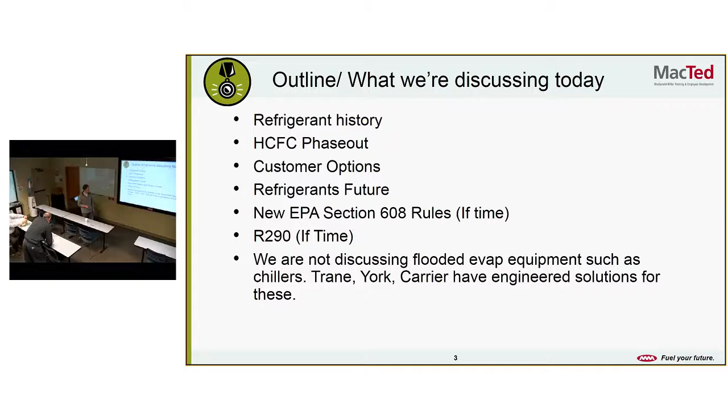So some of you were here in '96, went through this. Maybe not Dan, I was on the tail end of this. We phased out CFCs, chlorofluorocarbons. That's CFC. In '96 we got rid of the R11, the R12, the R113. Turned out that it made a hole in the ozone layer. I was in high school, I remember seeing the hole. It was all over the news.

It was a big deal. And what they determined was that those CFCs get up in the atmosphere, the sunlight reacts with them, and it destroys ozone. Ozone protects the Earth from UV rays from the sun, and it was letting too much in, and we had global warming.

So they brought in HCFCs. Those were going to be the magic potion. HCFC, that's your R22, hydrochlorofluorocarbon. They added the hydro. That's your 22, your 123, 401, 409, 402, 408. Some of those look familiar to you. 22, of course, is the most well-known, but there are others.

Anything that the R11, that I could buy it for $100 a pound for my old car, all that stuff is just reclaimed. It's just been scrounged up. R12, like R12, is used in cars for a long time. Anything pre-2000 possibly had R12, probably 94 and below, something like that. Most things around 94, 95 they went to 134a.

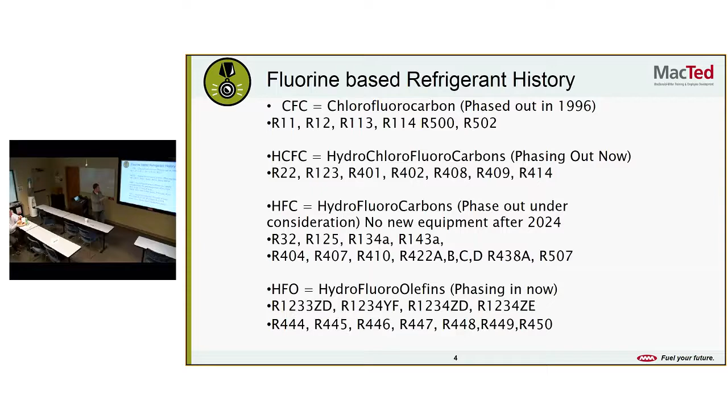The thing is, what we're finding, or what happens is, we can't jump HFCs. We can't go from equipment sold with R22 and put these in it. And I'll get to why here in a little bit. So what we're doing is this whole class revolves around HCFCs, getting rid of those, and getting rid of HCFCs, bringing in the HFCs, even though they already have a date, an expiration date.

So this all started with a thing called Montreal Protocol. You've all probably heard that before. Is that in relation to retrofit? Yes. Yes. There was a meeting.

They said we need to bring levels down starting in 2015. You start reducing these levels of HCFCs, and we want to have them down to almost zero by 2020. After 2020, there is no more importation of R22. or making it, so virgin R22. That's the big one that we're dealing with. There's others, there's this 142B and stuff, but we don't really get into that.

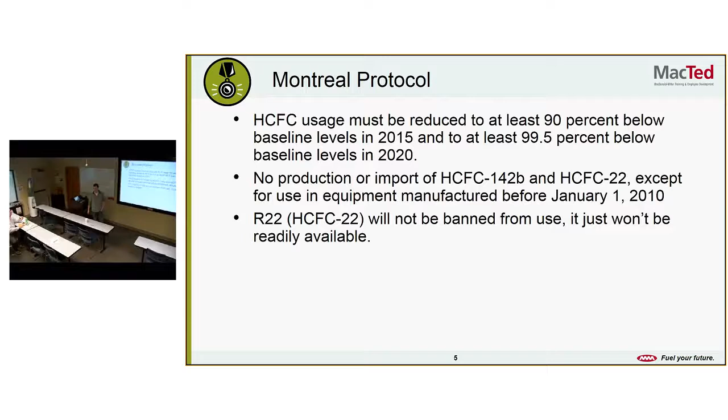So what that looks like is, it used to be we had unlimited supplies that could be made of R22. Supply demand, right? So we had a ton of supply. Things were cheap. Well, Montreal Protocol came in and said you need to cut whatever your production is for 2014. You need to basically cut it in half. And then you're going to continue to cut it all the way to 2020.

So right now, that's where we're at. This year, they'll be done. The major manufacturers, Chemours, DuPont, Honeywell, they're going to be done making it for the year probably in the second week of February. They start on the 1st. They make it for about 6 weeks. Last year, they made it for about 8 weeks, and then they're done for the year. They'll probably make it 6 weeks this year, and then they're done, shut down.

So whatever is made gets out there. Valentine's Day, supply houses get their allotment. RSD gets a certain amount. United, Johnstone, they all get an allotment, and away they go.

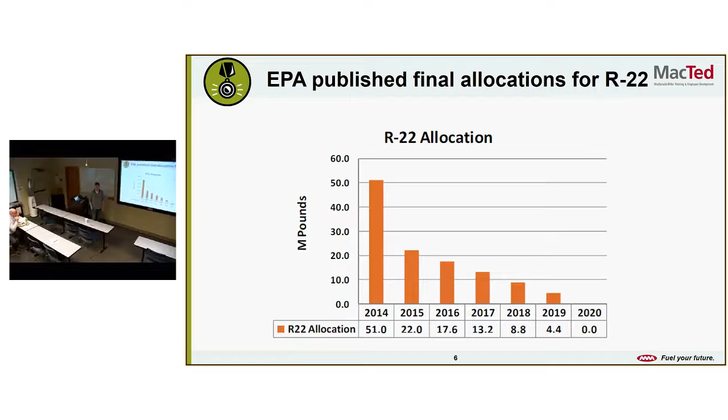So what that looks like, supply and demand, we used to be able—I remember, and I'm not that old, but I remember being able to go to RSD and buy a 30-pound jug for about 30 bucks. I'm sure it was cheaper at one time before that. And it stayed pretty cheap for a while until, you know, they knew that this was coming, and it started climbing, had a jump, and then it started climbing.

So we're somewhere right here right now. It hasn't climbed as much as projected originally. For 30 pounds? For a 30-pound cylinder. Yeah, one green jug. Everybody should be familiar with the green jug. So whether that's going to happen this year or not, I don't know. We'll talk about prices and where we're at today here in a few minutes. But that's basically, as our supply goes down, our demand goes up, and therefore our price. So that's where we're at.

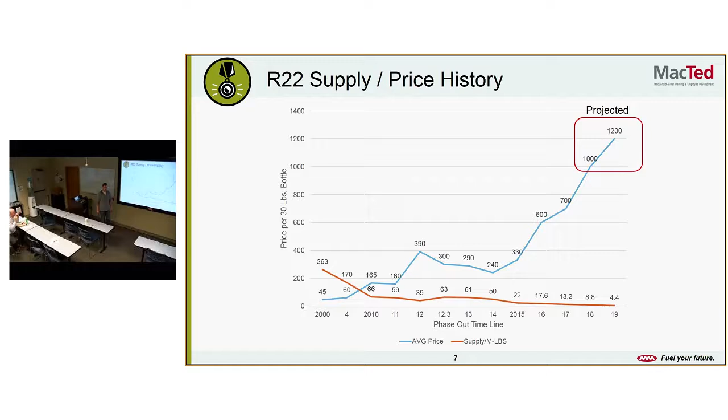So there's options for customers. This building, this was all R22 equipment. Upper building, all R22 equipment. A lot of buildings—I mean, this stuff was made for so long. It was the golden juice, you know. It was just, it was cheap. It worked well. It went into everything. So there's thousands and thousands of units that are out there.

Some of this, they have some options. They can do nothing, they can leave them. There's no law that says you can't use R22. We just can't make it. So there's no law saying you can't have it. There's a law that says you can't bring it in on the back of your truck from Mexico, but there's no law that says you need to get rid of it. So you can do nothing.

You can remove the 22 and put a retrofit refrigerant in. The reason that you would do that is because it extends the time that you can get the refrigerant for cheaper.

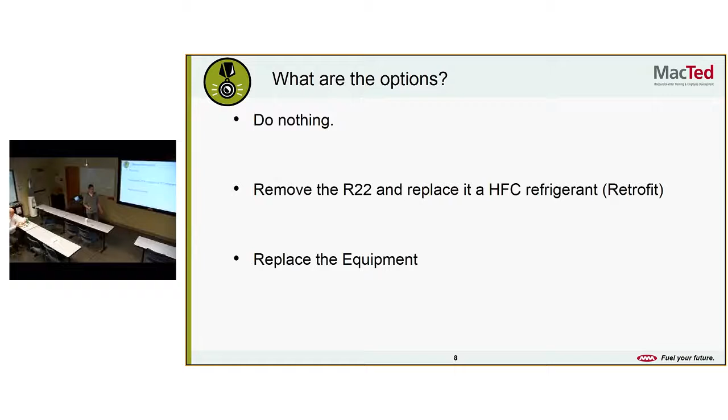Right now with the HFCs, remember there's a date for when you can't buy new equipment, but no date for when you can't buy the refrigerant itself. It's just new equipment that stops. We went through this in 2010 with R22 - they stopped making new equipment, and then production of the refrigerant tapered off. Pretty soon we had dry units for a while, and you're right back to what they're saying. It's a projection, so it'll happen. You can remove it and try to buy yourself some time, put something else in there, or you can replace the equipment. We'll go through and talk about this.

The good part about doing nothing is that nothing works better than what shipped in the unit - there is no magic juice. There's a lot of claims out there that you can take out R22 and put something in that has more capacity for less money, and it's not true, it just doesn't happen that way. So if you have equipment with R22, it's going to run best. If it's at your house or your business and it's running good, what's your risk? Do you have a high tolerance for risk? Leave it, deal with it.

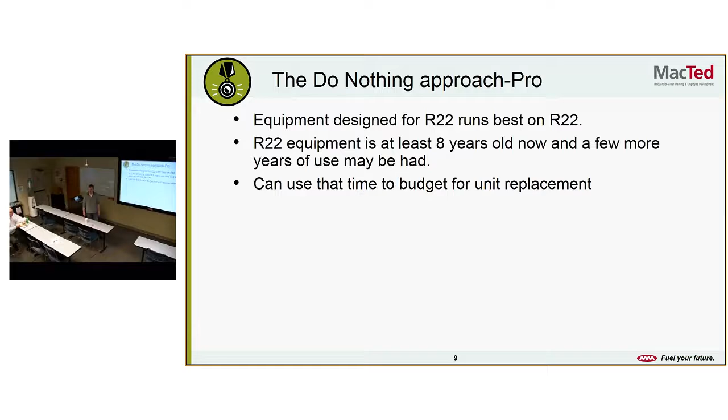If you're worried about it, like CBRE or some property managers, they want to do something about it. You may have a piece of equipment built in 2010 or 2009 that has R22, so maybe it's only 8 years old - you might have some life left in that thing. You can use that time to budget and figure out what you're going to do. So customers don't have to get super antsy about it, but it's something to think about.

The bad part is R22 is about 23 bucks a pound right now - I think it's come down a little bit, we'll look - but it's getting expensive, and that's wholesale, so we're going to mark that up. So if you have a blowout of a circuit that holds 100 pounds, that's going to get expensive real quick. Maybe you can afford one blowout, but what if it happens again? It's about your risk tolerance.

For non-techs, for the salesman, I tell them about 1.5 pounds per ton. So you got a 10-ton unit, you're about 15 pounds of refrigerant. You can kind of do the math from there. Lieberts tend to have a little bit more refrigerant in them, other units tend to have a little bit less.

Property managers - I know when we met with CBRE, Tom Ripley said they see this as a liability. If you got a strip mall with 10 package units on it, and each one has 10 pounds of gas, that's 100 pounds of gas or whatever - it's a liability, is what it is. So when they're looking at buying a building, they look at that and say, well, that's a liability, do I want to buy that, do I want to take on that liability? So there's reasons to get rid of that refrigerant.

He was also talking about an accounting problem with it too - as the values started spiking up, they'd have to actually identify it, it's on the books as income. Accounting's weird, I don't know. So if you lost a charge, you've got to deal with it.

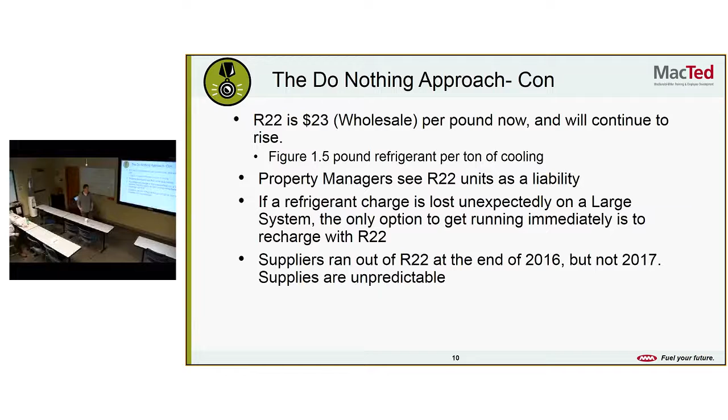So the good part about doing a retrofit is you're planning - you have time, you can gather what you need. We'll talk about those parts, but you can gather the necessary parts to do a retrofit. You can do it on your own timeline - do it on a weekend, do it at night, do it when it makes sense, just like anything, planned maintenance. You don't have to worry about the R22 shortage.

That's pretty big. Some equipment was designed for alternative refrigerants. There's a lot of Trane Intellipacks made in the late 90s up until about the mid-2000s that shipped with R22, but they could have had 407C in them just as easily. So doing that conversion may be pretty simple.

R22 has been known as a compressor killer forever. It's got high discharge temps, and eventually the oil converts over to carbon and you lose the compressor.

Retrofit refrigerants tend to have a lower discharge temp, so you may get some more life out of compressors, maybe.

Suppliers buy back R22, so that's a selling point. If we can go in and take the refrigerant, say you have 100 pounds of R22 that's clean, we can take it out and sell it to Hudson for 12 bucks a pound. Then we can knock the cost of that off and share that with the customer, and that saves them some money on their retrofit.

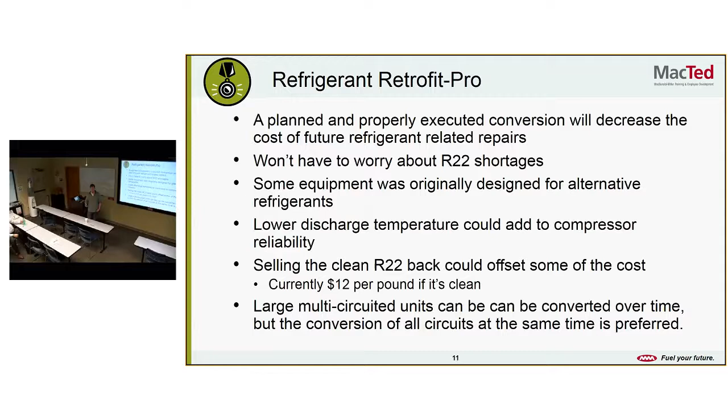This is a part from the chart from the Department of Energy. I think it seems a little generous, but basically what it's saying is that based on the size of your unit, of your system, you can count on about a 20% loss of charge per year. That seems high to me, but maybe if you averaged it over the lifetime of the unit, maybe you could build a case for that 20%.

But what it's saying is that on smaller systems at the current prices, it probably doesn't make sense to convert that unit, because the cost of conversion versus the amount of refrigerant you use on a yearly basis may not pay for it. But as you get bigger, that definitely starts to pay for itself.

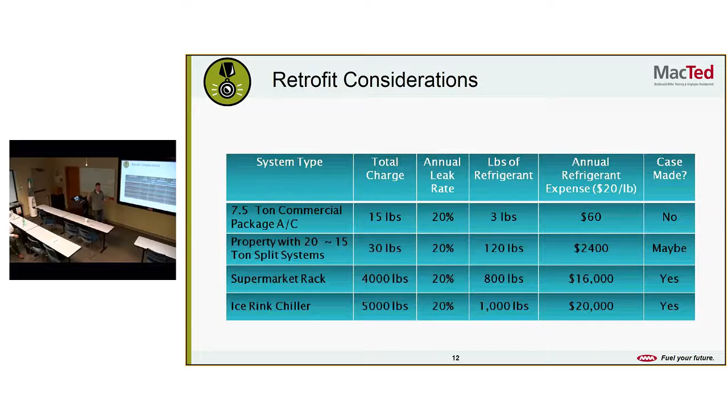And as the cost of R22 goes up, these numbers are going to get smaller and smaller. So maybe eventually a 7.5 ton unit is worth converting because the price is so high. But if you were to take this on its own, maybe it's not worth it. But if you have 25 of these, now it's probably worth it because that's how much tonnage you have on your building. So it's something to think about, because as a property manager, they have to think about their buildings as a whole, their campus.

So there is a bad part about retrofitting. There could be a drop in unit capacity on design days. Design days, that's generally 100 degrees outside air temp, 80 degrees inside, something like that. We don't have a lot of design days in the Northwest. Most of our equipment is oversized, so this really doesn't matter. The testing we've done, we've never seen 10%, but we don't have those temperatures either, maybe Eastern Washington. But there's some things to think about when you're proposing these.

Efficiency, energy efficiency will probably go down. If it was built for R22, it works the best on R22. So compression ratios change, and that changes the amp draw on the compressors. So that's your energy efficiency.

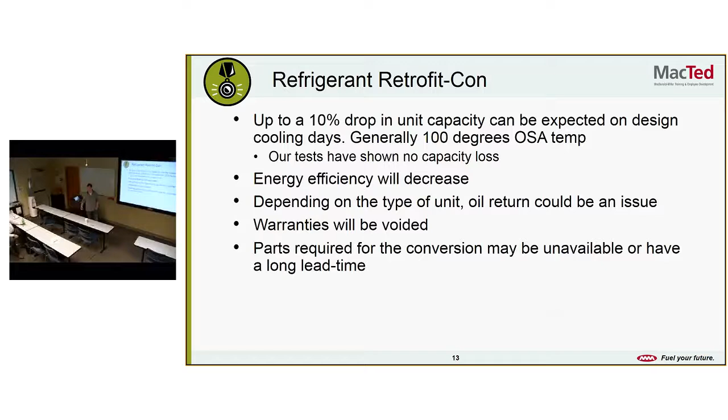Warranties will be voided, but this is all older equipment for the most part, so warranties isn't a big deal. And then parts required for the conversion, which we'll get into, sometimes take a while to get depending on what you need. If you're converting a 30-year-old Mammoth vertical self-contained unit and you need a liquid line solenoid valve, maybe you can't get it. Maybe you got to do something else. I don't know, we'll talk about it.

Then, of course, there's the last option, unit replacement. What you're buying today has 410A in it, and you're going to be in the same boat again in 6 years. So that's kind of the downside. And if they decide to ratchet up that schedule, they may be in a pinch even sooner. But I think it's a good idea to replace. There's benefits, there's efficiency benefits, but it is something to think about.

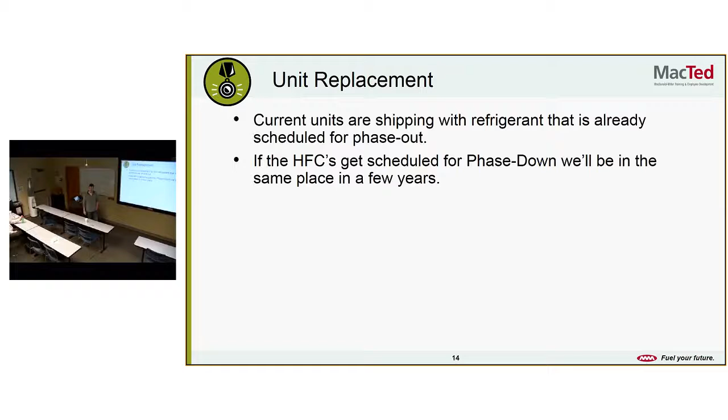So what are we doing? McDonald-Miller, we've standardized on 2 refrigerants for conversions: 422D and 407C.

407C is probably pretty familiar to you. Liebert's been using it for a long time, Trane's been using it for a long time, and several other manufacturers too. 422D may not be as current with you, you may not recognize it as much. Both of these are Honeywell products.

We did that on purpose, because there are refrigerants out there made by different companies that we don't know what's going to happen in the future if they decide to quit making them, or if the price all of a sudden goes up. We wanted to partner with a company that had a good brand name and some recognition, so that's why we went with Honeywell. There's another company that makes 422B, it's almost the same formula, but it's not made by Honeywell. It's a different proprietary blend. Well, what if they quit making it? Then we're kind of scrambling. We wanted somebody that's going to be around, and Honeywell's going to be around.

If the equipment is larger, or you're doing a compressor, we say 407C all the way. The difference is 407C can only be used with synthetic POE oil, it doesn't mix with mineral. Most R22 units ship with mineral oil, so you cannot just take R22 out and put in 407C. It doesn't mix with the oil if it's mineral. That's why we have this option. 422D does mix with mineral oil, so you can basically take the R22 out and put the 422D in. There's a couple other things to consider, but we'll talk about them in a few minutes.

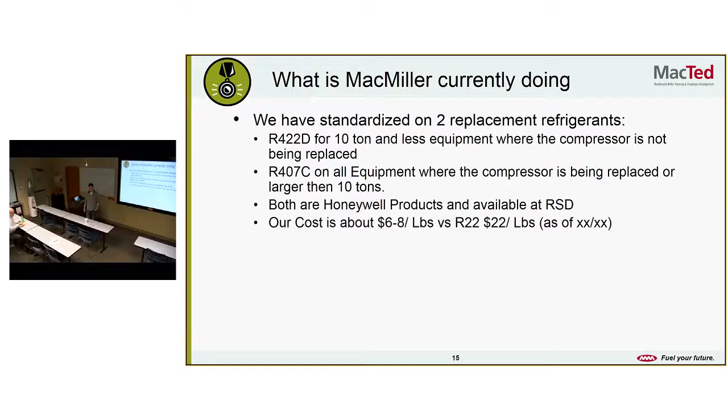Exactly. So we converted this building to 422D. We did every unit on it about a year ago, right before the summer, and everything's run fine. Guys took out the R22, put in the 422D, and it's been fine. Not that this is a huge heat load building, but upstairs, the second floor ran all winter. It still runs in cooling - you'd think it would economize. We didn't replace any compressors - we just did it as a test.

Could you envision a point, and if you could, what price point would this thing start to become a theft issue, the way guys were stealing copper coils out of units? Stealing R22, for the hassle, they'd have to be paying probably $30 a pound or more. I mean, there's a lot that goes into it, and it has to - I don't even know how that would work, but I've heard about refrigerant theft. There's caps, we've all seen the locking caps, there's a special key. So somebody's stealing it. Yeah, somebody steals it. I just don't know who it is or what they do with it.

Well, and they're also using it to get high on too. So I think what they're doing - you know what I think they do? I think they take it out and then they go resell it to a homeowner. They're not like we are, they're not selling it to Hudson for $12. They're selling it to Joe homeowner or another business park for $100 a pound. That's what they're doing.

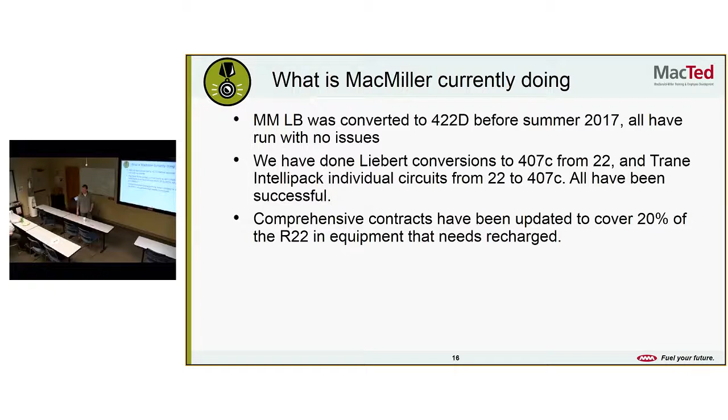When converting it to 422D, do you have to replace anything? We'll talk about it.

So 422D, just the specifics on it - $8 a pound. It mixes with mineral oil or POE, you can use either. It's in that nice lime green cylinder, so you don't have to change the oil. Take out the R22, you can put this in there. We're considering it residential light commercial, but there is no paperwork that says that it is - that's what we consider our light duty, light commercial option. Is this considered an HFC? Yes. Because you can't skip HFCs with retrofits. We can't buy HFOs right now for unitary systems - I'll tell you why, we'll get into it a little bit. But yeah, that's an HFC. Best to use it on small tonnage units where there's a leak, you're not changing out the compressor, so a flat unit or the customer just wants to get away from R22. That's why this building was perfect - a bunch of small tonnage rooftop units.

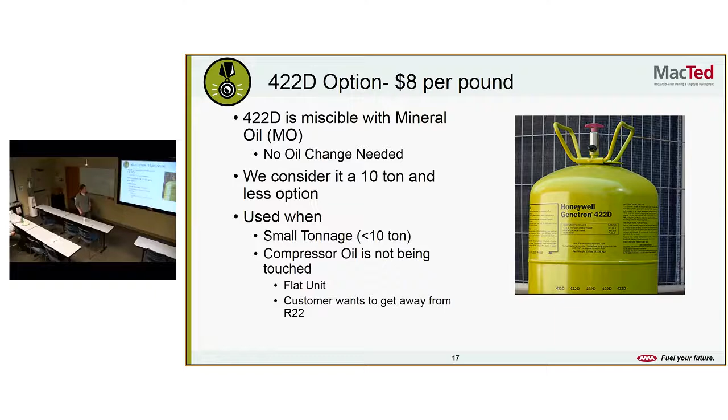Take the R22 out, put the 422D in, and they've run great. So it's nice and easy. The 407C is $6 a pound, a little bit cheaper. Pretty big difference from 6 to 8 over the long haul.

It only works with POE, that's your synthetic oil, only works with POE. It's perfect when you're changing a compressor or doing a major repair, or working on larger tonnage equipment where the customer wants to get away from 22. But you have to change the oil. It does not mix with mineral.

As we all know, or should know, about compressors, they constantly kick out oil with the refrigerant, and that oil has to come back, has to get entrained with the refrigerant. Mineral will not come back with this. It'll log at the lowest or coldest point in the system, and that's where it will stay. Eventually the compressor starves and burns up.

The capacity and pressures are all closer to R22, very close. What we want, and we'll go through the steps again, is to get 80% of the mineral out so that we have 80% POE in. That's where changing the compressor is ideal, because most of your oil is in the compressor. So you take that out, put the new compressor in, and now most of your oil change is done for you. You can have a mix of mineral and POE in a system, they don't hurt each other, they don't fight, they don't contaminate. It's just that the mineral's going to get stuck somewhere in the system and not come back. So you've got to get a good chunk of that POE in there.

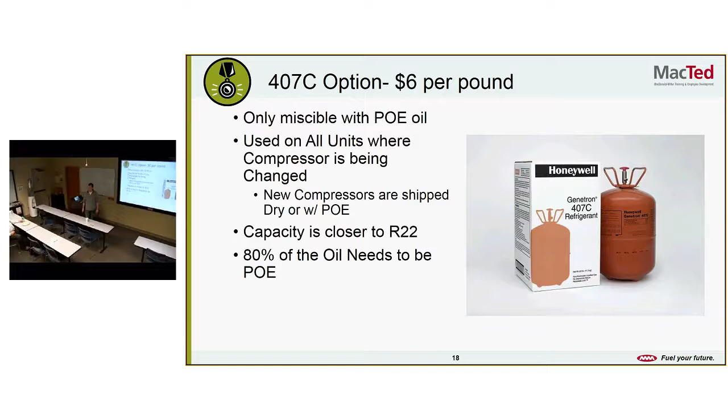Refractometer, yeah. So the process is going to be, and we're going to step through these step by step. It won't take that long.

How does a refractometer tell where all the oil is in the system? It can tell you how much of each is in the sample you take. So you open up the drain on the compressor, dump it in. It doesn't tell you where it's at, it just tells you what percentage of each is in your little sample. You're hitting a threshold there.

Seth, do you ever use the R11 flush? I've never used it, no. They sell it for line sets. Yeah, did it a lot in residential actually. You blow lines and oil out, for 22 to 410. Cut the TX out, mostly, put it together, blow it through. Makes sense, because most of the newer units... Well, I remember when 410A came out. 410A is, of course, an HFC, so it uses POE oil. They said you're going to blow up your system if you mix those two. And of course through the years it's come out that it's really not that bad. You can mix POE and mineral and it doesn't really hurt anything. Yeah, I remember that too, and then Copeland came out with that tech note saying it was okay to add R22 to the POE. And I'm like, wait a minute, didn't you tell us... Yeah, it was like forbidden for a while. All right, whatever you say.

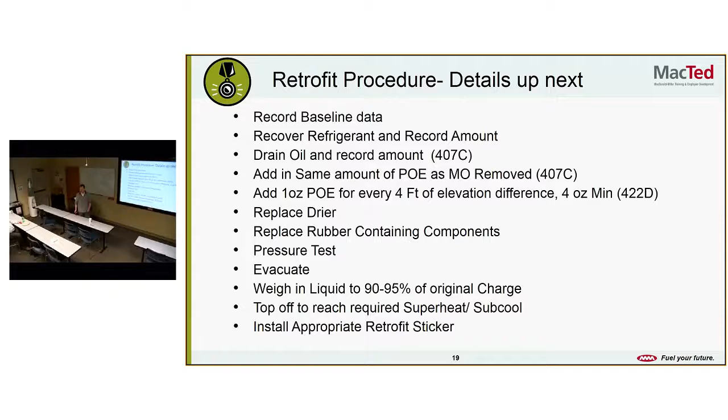So you come in under, then you trim it. And then you install the appropriate sticker. I'll show you the stickers here in a few minutes. So baseline data, we have this in tasking. It's in Mobile Tech tasking. You can ask for the tasking, retrofit tasking. Everybody good at tasking? Okay.

Amps, pressures, line set temps, refrigerant line temps, evaporator split, oil level. We've been experimenting with thermal imagers to get the oil level inside the hermetic compressor. Somewhat accurate, something to think about. If you can see the temperature difference of that shell with a thermal imager, maybe you can see the oil level. So we've been playing with that.

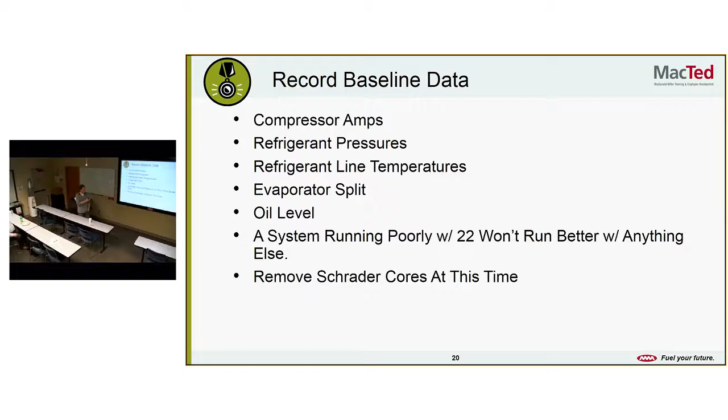Make sure it's running right. Take the cores out, pull out the gas. Weigh it. This is pretty normal stuff.

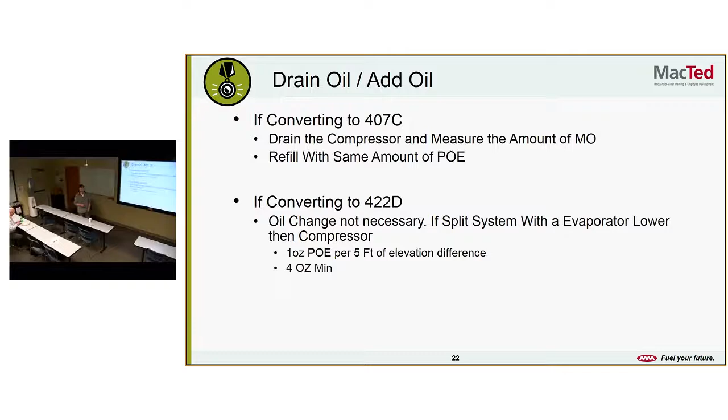If you're converting to 407C, you're going to drain the compressor, measure the amount, refill it the same amount of POE. Remember, you're trying to get to 80%, that's what you want. If you're going to the 422D, the lime green cylinder, you're not changing the oil, but if you're doing a split system with a difference in elevation, there is a calculation to add some POE in there. But as you'll see, if you have to do a split system, there's more we're going to talk about to make sure you do it right.

For getting the oil out, they sell this little CanVerter hand pump. I've heard it's a pain in the ass to use, very tedious, takes a long time. But you can use that inside of a compartment to pump the oil out of a hermetic compressor. You'd have to drop a line down the suction, so you're cutting the suction line, dropping the tube down in there and pumping the oil out. Kind of a pain in the ass if you were going to do it that way. If it's semi-hermetic, of course, you just use the drain.

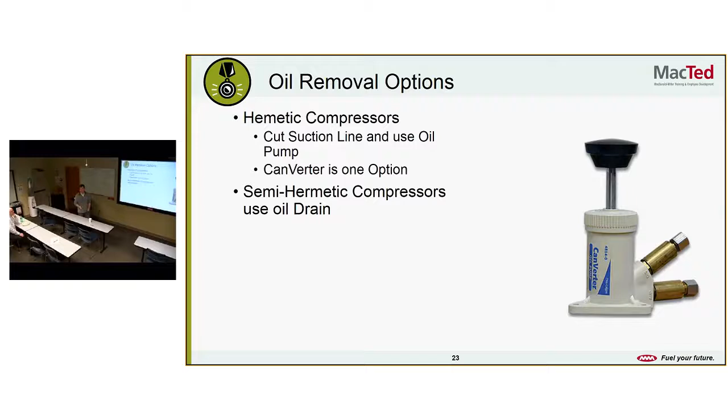If you're doing a compressor, make sure you get it ordered with POE or dry. Most of them come that way.

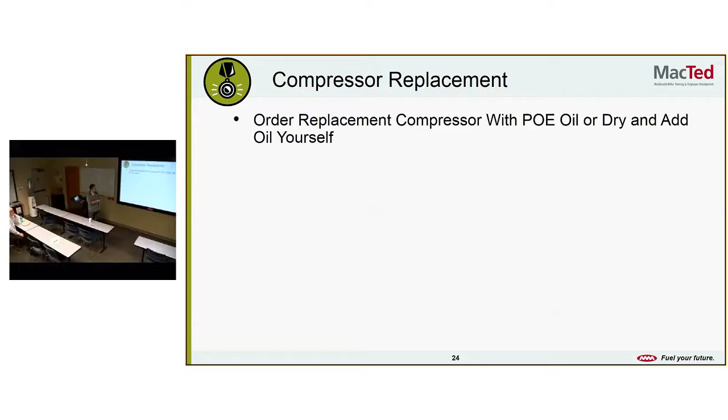Replace the drier, because you want a clean filter in there. Rubber containing components - remember this second C? Remember what that stands for? Chlorine. Chlorine makes rubber swell. So when you take out that first C and put an HFC in there, those rubbers shrink back to normal size. They don't shrink smaller, but they go back to normal size. Now you have a potential for leaks. That was the same with R12 to 134 for cars, probably, because all the O-rings had to be replaced too. Yep, I'd imagine. So you have to do all the rubbers.

Leaks will happen, especially if you're going to a synthetic oil. If you ever put synthetic in an older car, it just tends to run out the bottom. It finds every leak. I put it in my Jeep and it just ran right out the bottom. It's bad, man. I put normal mineral oil back in there and it never leaked a drop. So it's a bad combination.

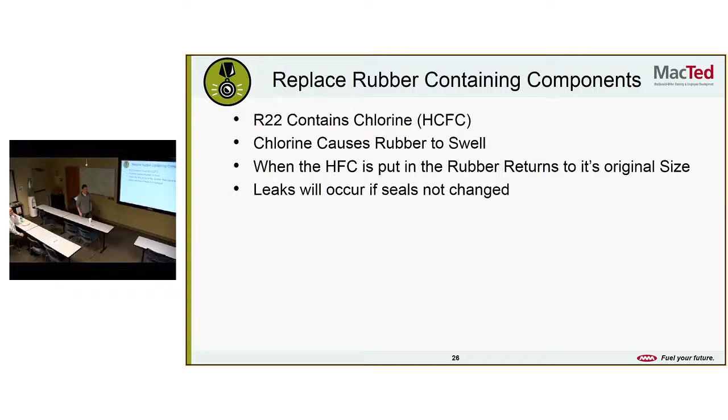So you got to replace your rubbers. Where are these at? Schrader cores, caps, valve body O-rings, EPRs, reclaim valves, solenoid valves, your little needle valve, your body gasket there. If you can rebuild these things, it's super easy. If you have to cut them all out and braze them in, it kind of sucks. But if you can rebuild them, it's not bad. It's just a matter - like on these, most people have rebuilt a solenoid valve. You just unscrew this bonnet, lift it up, replace the O-ring, put it back together. You already got the gas out, so no big deal. You don't even get your torch out. But you have to replace the rubbers.

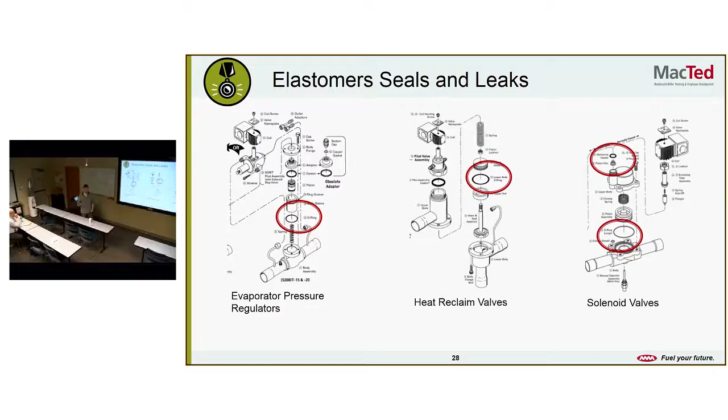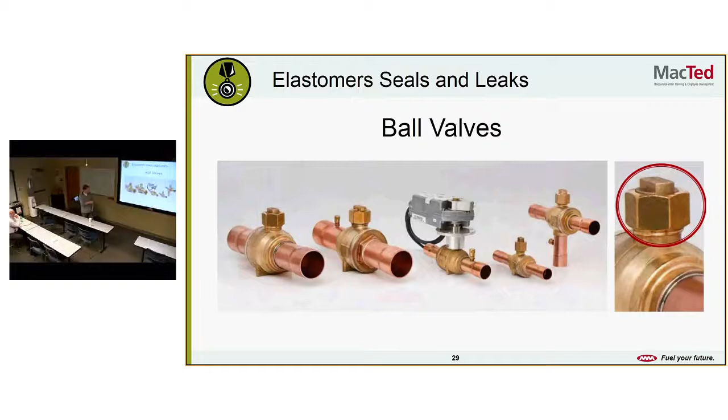Otherwise you're going to have leaks. And that's true for 422D, 407C, all of them. So part of the process is knowing where the rubbers are. Ball valves - you may have a ball valve, you may have gaskets down in here, you may have gaskets over here on the Schrader cores and caps. So you need to identify where all the rubbers are.

Compressor terminal gaskets, we're still experimenting with these - Copeland K bodies, Carlyle 06Ds. If you can tighten them, then that's fine, because remember, all the O-ring does is shrink back to its original size. So you just tighten up the terminal stud and it's fine. If it's a hermetic compressor, it's fine - those aren't adjustable, they don't have O-rings in them. So it's something to keep in mind. Try to retorque those things, tighten them up. Teflon, copper and steel aren't affected, so rotolocks - those are fine. That's a Teflon seal, which makes it easy.

Try to rebuild the solenoids, and you may need to ask for a parts breakdown - like on compressors or call up Trane, say send me a breakdown of this unit. Most of the time you just look. You can tell, you know where your valves are in a system. See if there's any rubber in there that needs to be replaced. Standard package units, that's Schrader cores and caps - nothing to it. Liebert units probably have a liquid line solenoid valve, not much more. As you get into the bigger stuff, your IntelliPaks and things, you're getting some more components.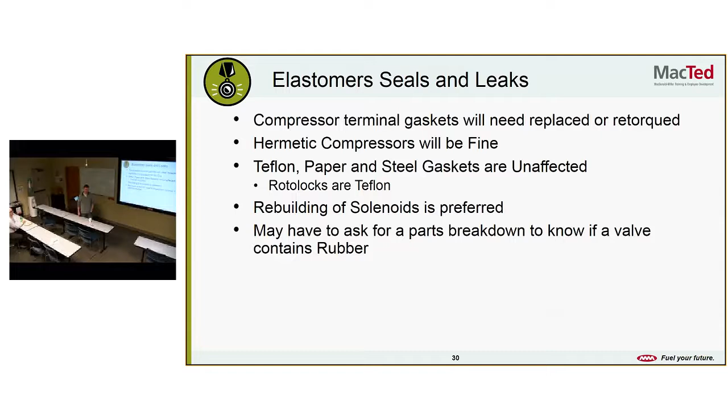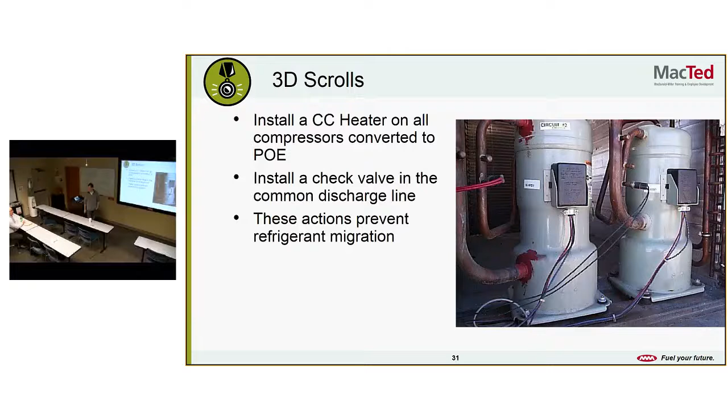Because these things - if you know how a scroll works - they don't have valves. So they have a discharge check valve up inside the head. Those things tend to leak, and it gets worse when you change the oil or go to an HFC. So what happens is these refrigerants fill up with liquid, or that refrigerant migrates through the compressor and builds up in the evaporator. Then you kick it on, and all that refrigerant down here inside the sump - what's it do? It flashes off, it kicks all the oil out. Now you got a compressor running dry. So those are some things to think about.

Right, Mark? You were going to say that, huh? I was saying, you guys are like goddamn surgeons with this thing. I can't believe all this.

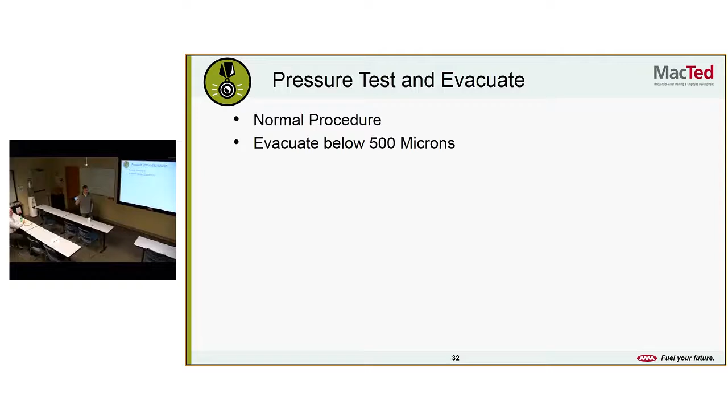Pressure test and evacuate - normal, evacuate it down below 500 microns. Recharge, we already talked about it - weigh it in, come in just under, then trim it.

Superheat, subcool, normal stuff. 422D and 407C are blends. If you haven't worked with blends, PT charts are a little different. I'll show you an example in case you don't know what that looks like.

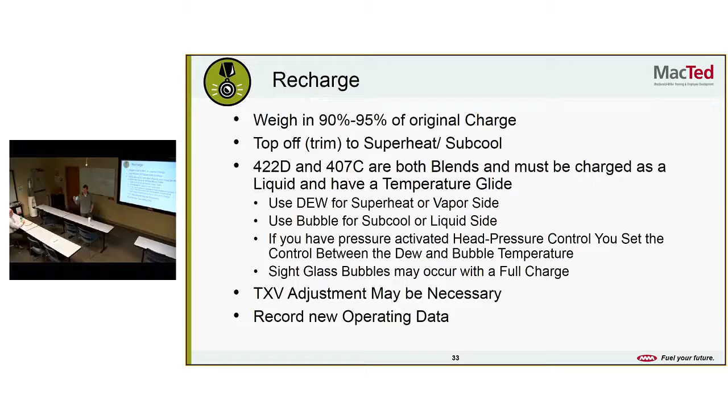You use the dew side for superheat, bubble side for subcool. If you have any pressure controls, head pressure or low pressure, look at these charts. R22 was a single component, so you had one pressure, one temperature - super easy. These have a glide because they're blends. So over here, 100 degrees equals 212 on the bubble, but 198 on the dew. So if you're setting a head pressure control, you put it in the middle.

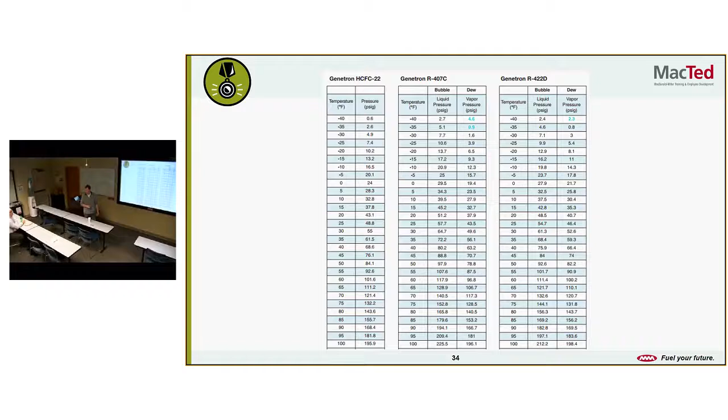That's how that works - you just split the difference with your pressure controls. But when you're charging to these, make sure you're using the proper side. You're using one column for subcooling, and the other column for superheat. But these canisters come with the PT charts, so that's no big deal.

New cores and caps, conversion stickers - we have a bunch of stickers made up. They say McDonald-Miller, for service call, 407C. It's the color of the cylinder, so it looks nice and fancy. When you did it, what oil, how much refrigerant you put in there. That's 407C, and this is the 422D - lime green, just like the cylinder color.

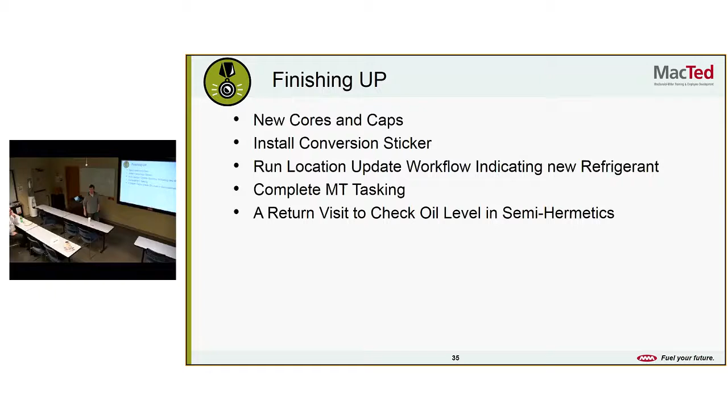There's a workflow available for the location updates, so you would run that so that we know it's been converted and have a record of it. Complete the mobile tech tasking - new compressor draw, new amps or new volts, all your data, splits. A return visit is advisable. If you do one of these, come back in a few days and check the oil level, because we've found that often, as that mineral oil gets kicked out of the system, you're going to be low. So it's a good idea to come back and budget that on the front end so you're not eating the cost later on.

What about these units running in low ambient conditions? It's already an issue with R22 - you can't get your head pressure up if they don't have head pressure control. Have we seen a lot more issues with the new refrigerant? Yep, all the refrigerant gets trapped in the condenser. Some are worse than others. Yeah, it is a problem. That's why you need to make sure your head pressure controls are working and your economizer switchover is correct.

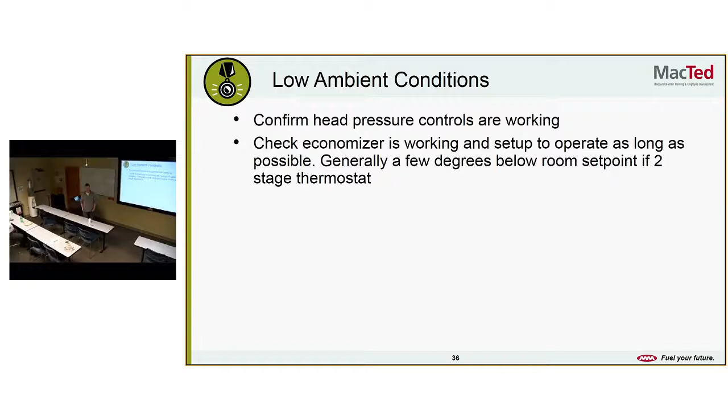Don't have that compressor on when it's 50 degrees out. Don't set all your enthalpies at D. It's basic economizer theory - make sure those things work. It's not difficult, you just need a refresher so you're focused on economizers. Or I'll draw you fancy little pictures on the board if you want - we can do that too.

So some other info to finish up. If a building's partially converted, don't go in there saying McDonald-Miller only lets me do 422D. We don't want to mix. Last thing we want is 427A here and 422B and 422D and 407C and 421B and all these others. Be consistent. You can go buy whatever you want - no one's going to slap your wrist. Just try to stay consistent.

We actually have stickers for all the other refrigerants - they're already made, we already have them. So be consistent, we don't want to put undue pain on the customer or on you.

We haven't tested these with heat pumps, so don't go out there selling every hydronic heat pump in downtown Seattle on a conversion. Please, salespeople. There's one in the works to test them. Yeah, we need some samples. So I got a bunch of contracts. Yeah, I bet.

One of the things we don't know about heat pumps - we know they'll work fine in cooling, but I don't know about heating. They have lower discharge temps, and I don't know if that translates into lower output or not, because I don't know how much of that is sensible heat coming off your compressors versus the latent heat as it condenses from a gas to a liquid. I don't know - we just have to test it.

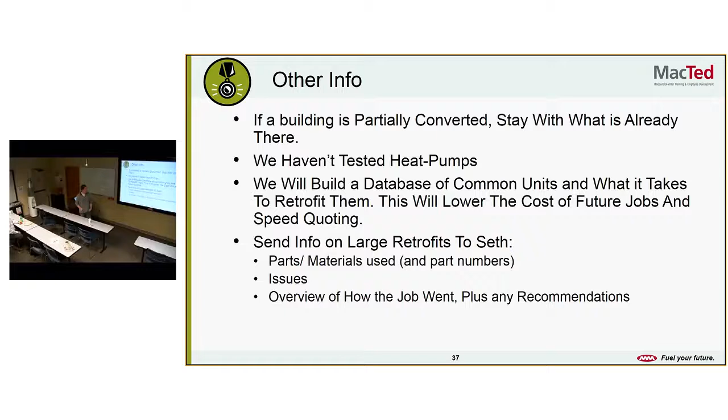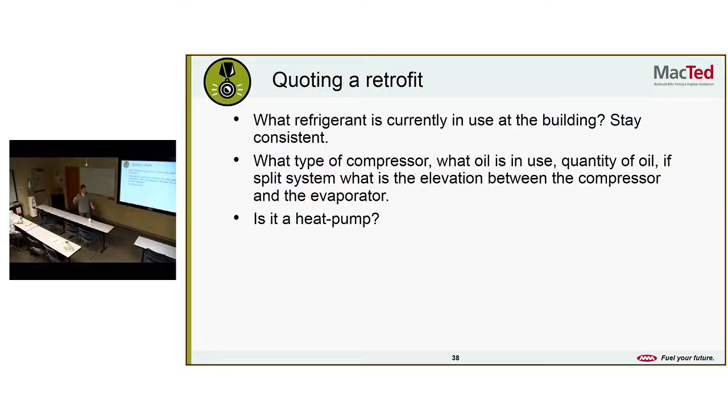Send that to me. Know what refrigerant's there, stay consistent, what type of compressor, what oil's in use, if there's a difference in elevation, is it a heat pump? Know that stuff, there's a basic form. I think that's about it, I'll hand that out in a minute.

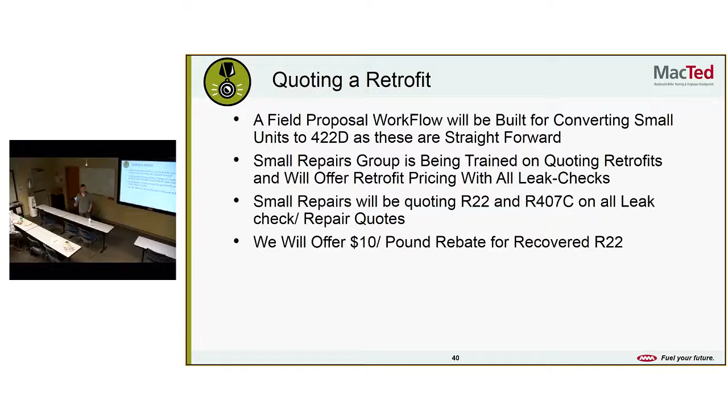We were going to do a field proposal for quoting these. We haven't done it because we determined we didn't want to be quoting every unit out there for a retrofit, only when it makes sense. So that's the ones we've done so far. We're trying not to get into the retrofit business, we just want to have it available for customers.

I think Justin put in 407C. He wasn't gonna name names, but he wasn't a big fan of 407. Could be any Justin. He wasn't a huge fan of the 422 or the MO99s either, and he'd go for hours about why. I've heard him go on about it before.

I don't want to hand this out because I didn't want you staring at it instead of me. I like it, I like eyes on me.

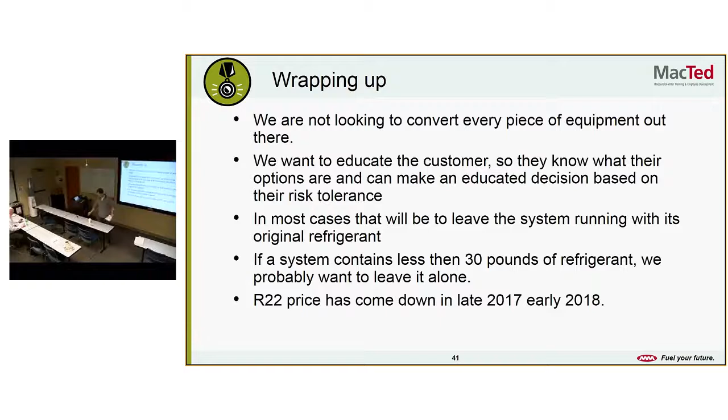So the first page, we got a handful. Oh, Jimmy Hoettel, hey Jimmy. Got a few people on there. I'll hand these out, this is a little packet to you guys on the Skype. I don't think... get to that in a second.

So it kind of says what I just told you, but written out, and it's also written for customers and salespeople, kind of what we're doing, but it doesn't get into specifics like ball valves, heat reclaim valves, whatever. On the back side is a form with the kind of questions you need to know if you're going to be converting. All this is on the Dropbox too, so if you don't like paper you don't have to take this. I just wanted you to have something to look at, but you can look at it on your iPad as well. Know the answers to these questions, because this is stuff you want to know.

You want to know if you have a liquid line solenoid with a rubber seal in it.

There's a service update from ICOR talking about EEVs. Electronic expansion valves look at the pressure and/or temperature of the suction line, or more. They have a built-in PT chart into their brain, they do the math and adjust their stepper motor based on that temperature and pressure. You take out 22 or whatever's in there and put in something else, there's no way to tell it that there's a new refrigerant, so now that thing's off, it doesn't work right. So if you have EEVs, you need to look more closely and see, can you change the mapping profile of that stepper motor? Can you tell it what the new refrigerant is? Because if you can't, you're going to be screwed.

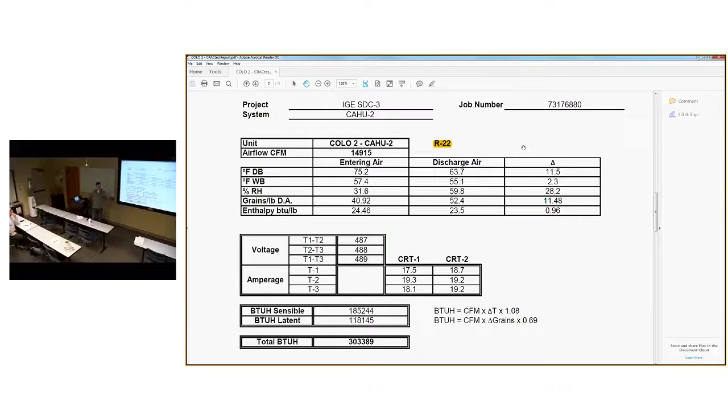Jimmy did the conversion, and then we had Tab go in on two identical units. One is R22 and one was converted to 407C. So this is CRAC 2 on R22. These are the readings: discharge air, delta, wet bulb, dry bulb, RH, grains, enthalpy, compressor amp draw. What we're really concerned with is our total BTU, because that's our capacity. We're concerned with capacity and our amperage.

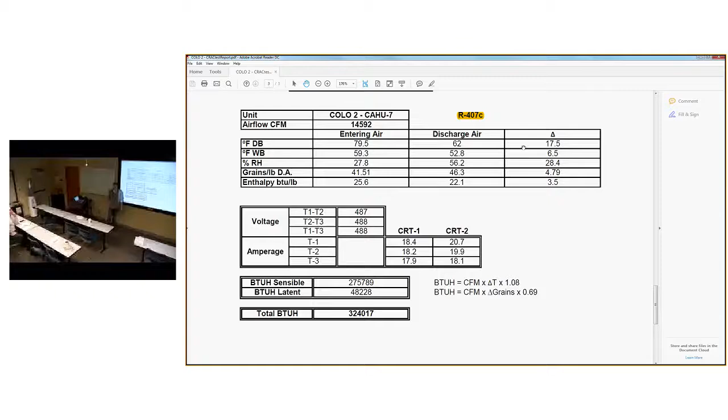So this was the unit running on R22, and then the sister system next to it running on 407C. That was 303, 389. This is the 407. We actually had a gain. We picked up capacity by going to 407C. We had a slight uptick, I believe, in compressor amps, but we had an increase of capacity, so that's pretty good. Now this unit had an indoor coil replaced.

I don't know if the other unit did. Maybe Jimmy can chime in - I know if he talks, we can hear him. But sorry, no, neither coils were replaced. That's pretty good proof that not only is it working, it's working better than it was.

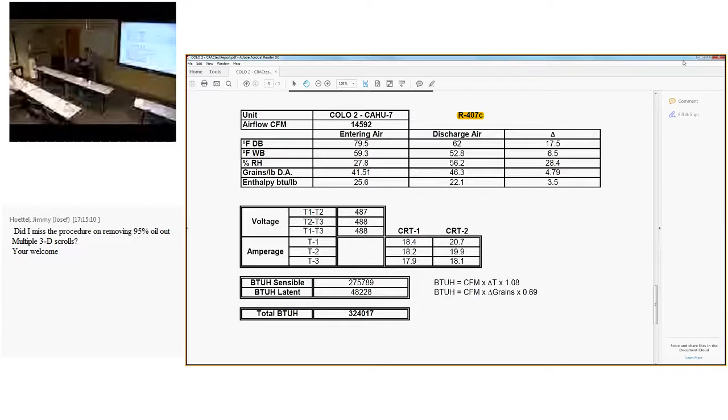So that's something. It's in your packet, so you can look at it in more detail if you want. And I'd like to get more of these done as time goes on, because that's pretty good for the customer, since they've got a bunch of these things. So now we can start doing more of these conversions over time.

The last thing, since you guys haven't got up and left yet - any questions on the retrofits? I mean, part of it's going to be when you come to it, asking questions, asking me, asking your foreman, whatever. Link, small repairs, they're all up to speed on these.

They've done some. So the new refrigerants we're looking at that are coming into the market, the HFOs, hydrofluoroolefins. Trane has a pony on - they've picked their pony, they're like 514 or something, is their HFO. York is using like 1233zd, I think is what it is. There's a bunch of different ones out there, but they're low on the global warming, low on the ozone destruction. The problem is some of them are mildly flammable.

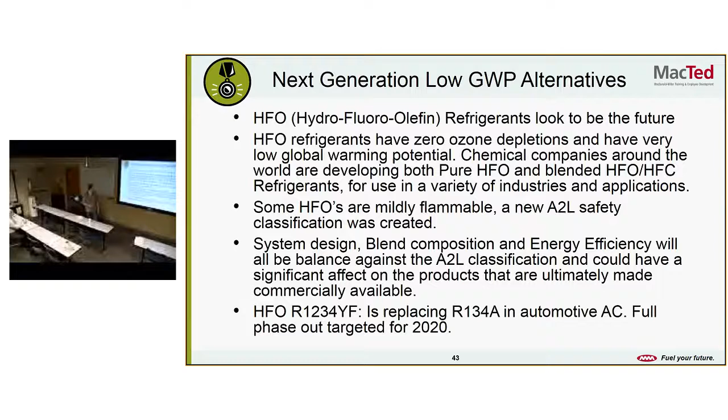Mildly. So what ASHRAE did - ASHRAE has come up a few times tonight - ASHRAE created a new classification. This was the classification scale for years: A is non-toxic, B is higher toxicity, and then 1, 2, and 3 goes up as it gets more and more flammable. So R22, propane - I think ammonia is right, I think ammonia is like a B2.

They had to create a new classification because these HFO refrigerants are difficult to ignite and sustain. So if you took a jug of HFO and put a lighter to it, it probably wouldn't light. But if you were to vaporize it or heat it up, you could get it to light, but it won't sustain - it doesn't continue to burn on its own. So the good part is it doesn't continue to burn. The bad part is it's slightly flammable.

And do you want that in your VRF system running through miles of refrigerant piping in your building? Building codes haven't adopted it yet. So York, they haven't installed anything with that 1233 YZ or ZE or whatever it is. Trane hasn't installed anything with the 514. They're waiting for the building codes.

So what's probably going to happen is building codes are going to adopt and say yes, you can use this, you can use your A2L refrigerant, but it needs to be in a central chiller plant where you can control the environment. You can have fire suppression, exhaust fans, barrel relief vents piped to the outside, and interlocks between that and your boilers. So if something happens, you can control it.

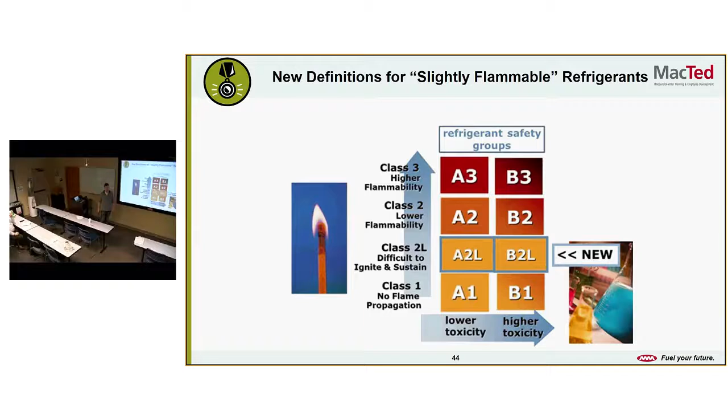I mean, they're 10 ounces, I don't know. They're a small amount, not hundreds of pounds.

Waiting on building codes, we'll see what happens. We don't know what Trump's going to do though. So with the whole EPA thing, they've lost funding. We don't know. All this could be for nothing.

But the thing is, that's just the United States, and they're not the biggest market in the world. There's still China, Europe, Japan, and the manufacturers have already dropped R22. They've already dropped 410A, like they're moving in a different direction already. So even if the US was to allow all this stuff to come back, the major manufacturers have already moved on. They've already invested millions into these HFOs, so it doesn't really matter.

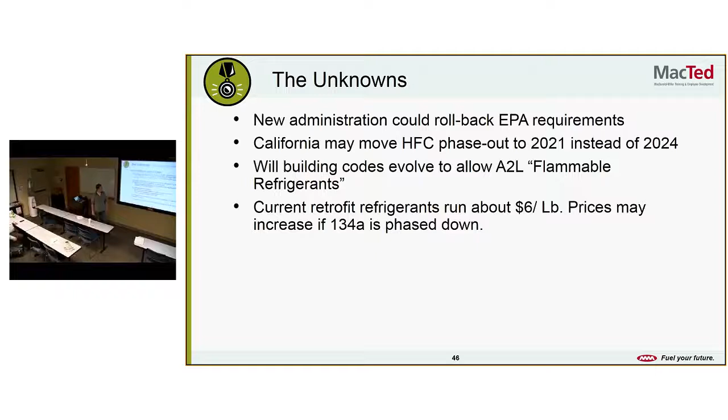Yeah, that's pretty much it. If you guys want to keep talking, I'll keep talking, but it's up to you guys. Those are the main ones I wanted to talk about. There are some new leak rates coming in 2019. We're gonna have to start repairing stuff that we don't now.

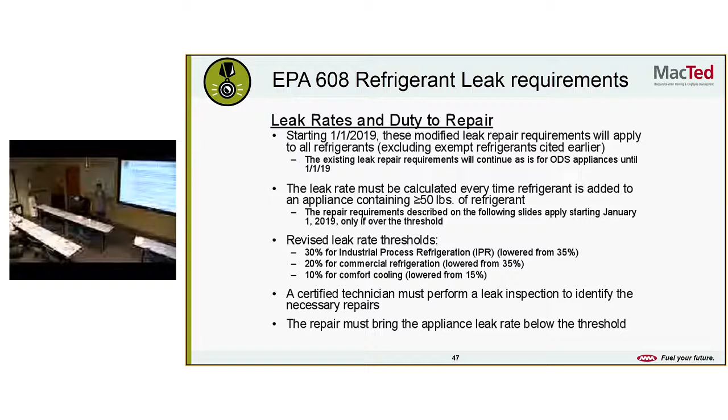Is that part of the EPA 608? Yeah, the new 608 rules. You have to do follow-up verification for leak checks, but we're a year away. Right now it's gonna be over 50 pounds is what it is.

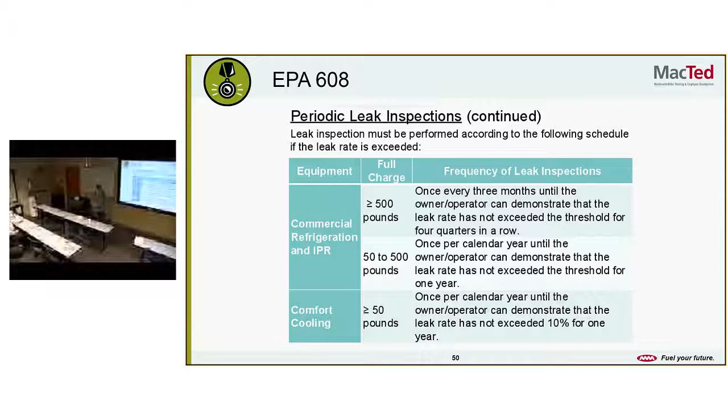So what's the Bluon stuff? Is it just another name for one of those other refrigerants? Yeah, so Bluon TdX 20 is what their trade name is. It has an ASHRAE number, R4 or something. It is a multi-component blend.

What they sell it as is that you can take out R22 and dump this in, just like 422D. Same thing. They claim higher efficiency, lower operating cost. They claim you don't have to replace any rubbers. That's big, that's what they claim. They recommend it, of course. They say you should, but they say you don't have to. So, I don't know.

The problem with the Bluon is, unless we do it at a building on campus, how do you tell a customer to try it? We'd have to back it up pretty substantially, like say we just want to dump 50 pounds of this in your system and see what happens. And then what if there's leaks?

Two split systems up in the gym area, or one split system in the gym area, you could throw that in. Probably could, yeah. It's like a York unit. What refrigerant's in it? 410, I think. No, we couldn't, because POE on it. No, because 410's not Bluon and 410 doesn't mesh. They're different components, different pressures, different everything. Yeah, because Bluon's an R22 replacement.